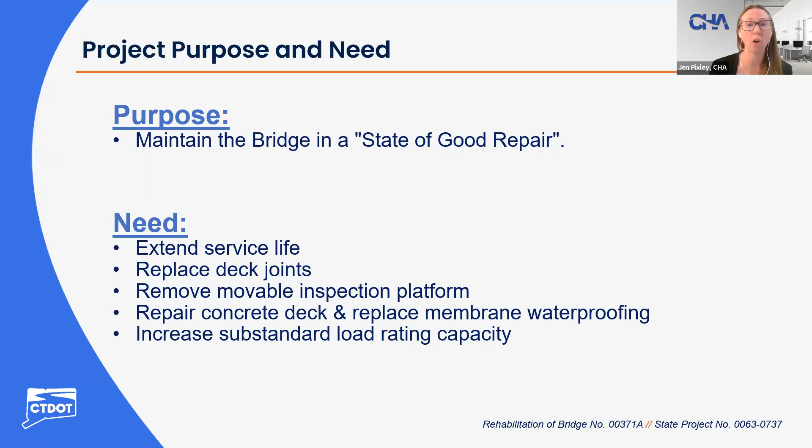So for project location, Founders Bridge carries Route 2 eastbound and westbound over I-91, the Connecticut River, and the Connecticut Southern Railroad in Hartford and East Hartford. The bridge was built in 1958 and had a full superstructure replacement in 1995.

The bridge carries 3 lanes in the eastbound direction and 4 lanes in the westbound direction. Spans 1 through 5 have an out-to-out dimension of approximately 92 feet and widens to approximately 112 feet at spans 6 through 11, as an 18-foot wide sidewalk frames into the main structure on the bridge on the south side at Pier 4.

So here is a colored plan and elevation view of Founders Bridge. This view shows the west side of the bridge on the Hartford side, and the next slide will show the East Hartford side.

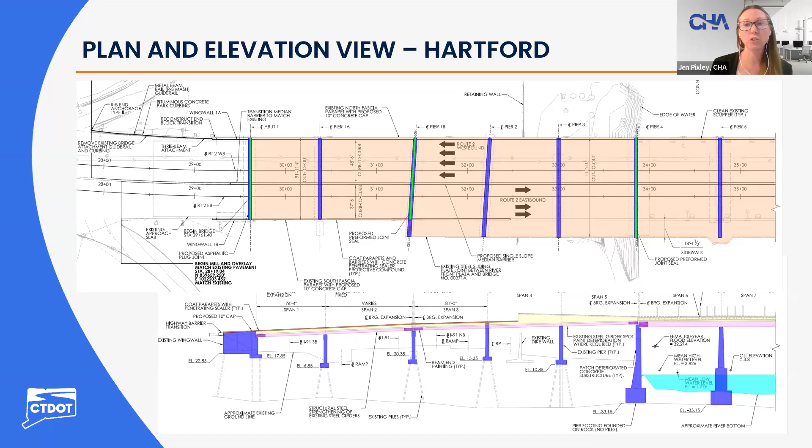So the bridge is an 11-span structure comprised of a concrete deck supported by welded steel plate girders. Spans 1 and 2 are 2-span continuous. Spans 3 through 5 are 3-span continuous, and spans 6 through 11 are 6-span continuous. The superstructure is supported by a concrete abutment and piers.

So Route 2 is a divided highway consisting of 4 11-foot travel lanes on the westbound side and 3 11-foot travel lanes on the eastbound side, with a 3.5-foot right shoulder and 1-foot left shoulders. Concrete parapets exist at both fascias and the medians. The median barrier separates Route 2 eastbound and westbound, and a sidewalk barrier separates the sidewalk and Route 2 eastbound.

Before getting into existing conditions, I thought it'd be useful to note how condition ratings are determined and their purpose. Per the CTDOT Bridge Inspection Manual, a condition rating is a judgment of a bridge component's condition in comparison to its original as-built condition, used to provide an overall characterization of the general condition of the component being rated. Condition ratings are assigned a numerical value, each indicating a different condition: 8 being very good, 7 good, 6 satisfactory, 5 fair, and 4 poor.

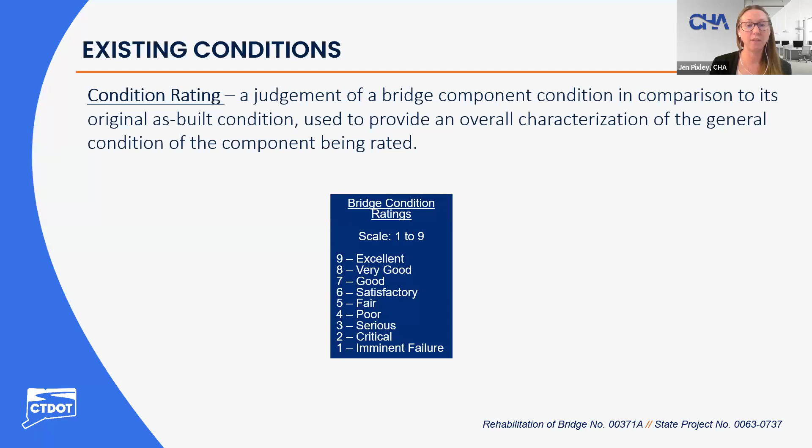So now we'll discuss existing conditions of Founders Bridge. First, for the deck. Overall, the deck is noted to be in satisfactory condition.

The underside of the deck exhibits shallow rebar, map cracking, and hairline cracks with efflorescence and rust staining, some of which have dampness and seepage. There is isolated honeycombing with exposed rebar up to 1/2 inch deep, numerous hollow areas, numerous spalls up to 2.5 inch deep, and isolated spalls up to 4 inch deep. Several of these spalls have exposed rebar.

So the true condition of the deck is unknown due to the bituminous concrete wearing surface on top.

Existing deck joints are in fair condition. There are asphaltic plug joints at abutment 1 and Pier 1B, which were installed in 2012. There are modular deck joints with concrete headers located at Pier 4 and abutment 2, which are original to the deck and were installed in 1995.

The asphaltic plug joints were recently repaired. Modular deck joints exhibit separations up to 15 feet long between glands and steel extrusions, with light visible below, moderate sand impaction in the joint glands, as well as ponding water. Concrete headers exhibit random spalling up to 1 inch deep, as well as other spalls up to 2 inch deep. The pourable seal joint at abutment 2 is missing up to 50% of the joint length.

The sidewalk sliding plate deck joints with concrete headers are located at Pier 4 and abutment 2 and exhibit isolated spalls up to 3/4 inch deep in the concrete header. The concrete parapets are in satisfactory condition and the medians are in good condition.

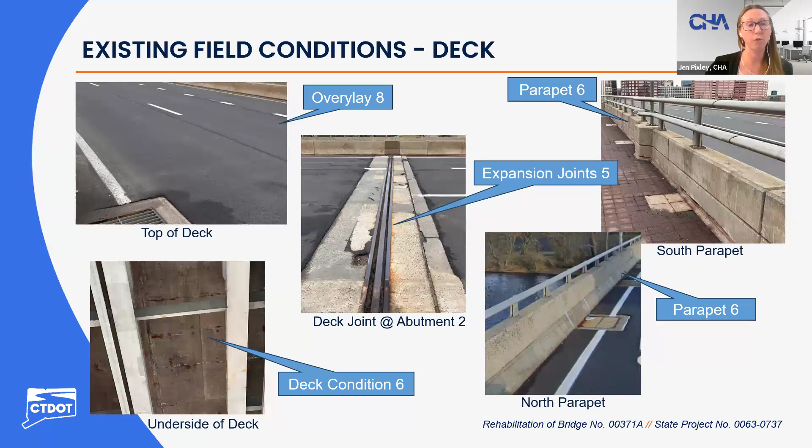So, existing conditions at the approaches. Overall, the approaches are in satisfactory condition. The approach slabs are not visible as the approach pavement is noted to be in very good condition, as they were recently paved. Approach guide rail at the northwest approach is in satisfactory condition and exhibits some collision damage. This guide rail appears to meet RI standards. The guide rail and bridge attachments do not meet current CTDOT standards and are not MASH compliant.

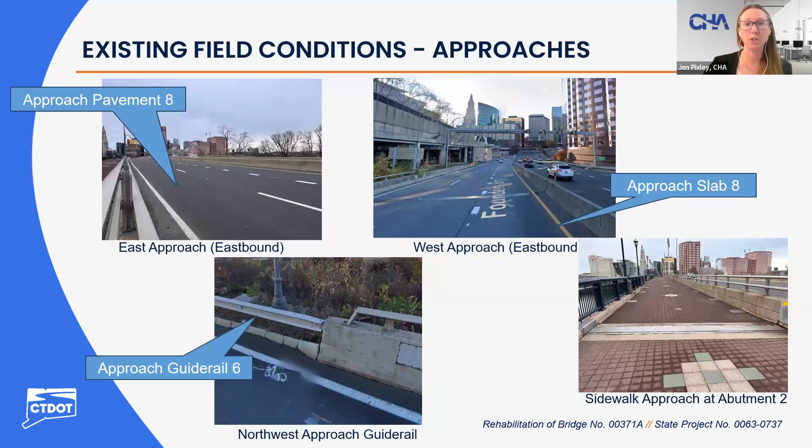Existing conditions for the superstructure. Overall, the superstructure is in satisfactory condition. The bearings are noted to be in fair condition. The bearings consist of elastomeric expansion bearings, steel fixed bearings, and pot bearings.

The elastomeric bearings exhibit isolated minor curling and bulging, random gaps up to 1/4 inch between the pad and pedestal, with up to 27% loss of bearing contact area, and laminated rust at sole plates.

The fixed bearings exhibit random moderate to heavy rust, anchor bolts slightly tipped and nuts loose or backed off, and gaps up to 1/4 inch between masonry plates and pedestals, resulting in up to 71% loss of bearing contact area at one location, and at all other locations up to 20% loss of bearing contact area.

The pot bearings exhibit isolated sole plates in contact with keeper blocks, light to heavy rust, and up to 1/16 inch deep section loss due to leaking joints, isolated PTFE strips sliding out, and isolated Teflon shavings observed.

The girders are noted to be in satisfactory condition. They exhibit random peeling paint and up to heavy rust, isolated laminated rust, and isolated minor losses, which result in less than 5% flange loss and less than 10% bearing and shear loss.

Structural steel paint is noted to be in good condition, with less than 5% of the exposed steel surface area showing evidence of rusting and missing paint coating.

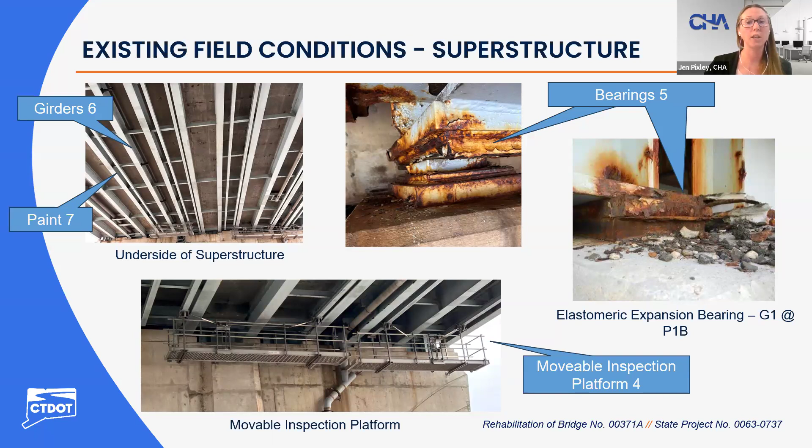The movable inspection platforms are not functioning and are in poor condition. These will be removed as part of this project.

For the substructure, overall, the substructure is in satisfactory condition. The concrete abutments exhibit vertical, horizontal, and map hairline cracks with efflorescence and rust, hollow areas and spalls up to 2-inch deep with and without exposed rebar.

Piers 1A, 1B, and 2 are concrete piers with pier caps and columns, and piers 3 through 9 are solid concrete wall piers with post-tensioning.

The pier caps and columns exhibit linear and map hairline cracks with isolated efflorescence and spalls up to 1/2 inch deep. Wall piers also exhibit linear and map hairline cracks with random rust and efflorescence, as well as isolated hollow areas, isolated spalls with exposed rebar up to 4-inch deep.

Piers 4 through 8 stems extend below the water line and exhibit spalls with exposed rebar and some with section loss, abrasion throughout, hairline cracks, and some cracks open up to 1/8 inch wide.

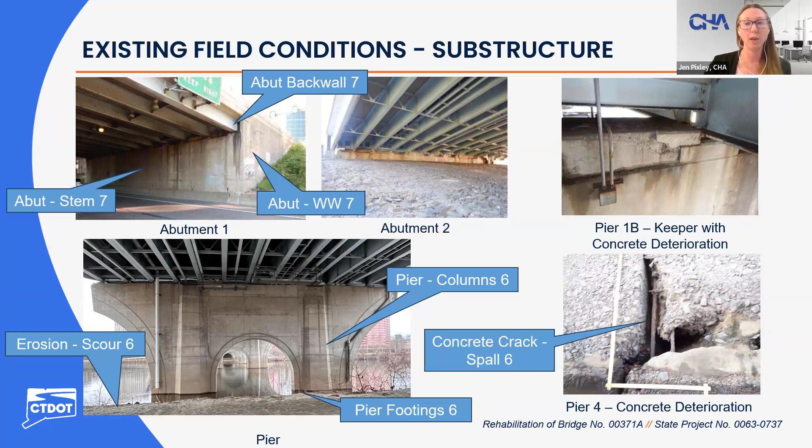For erosion and scour, noted to be in satisfactory condition. There are 2 areas of erosion, one at abutment 2 and one at pier 2, which are both located below scupper pipes.

Existing condition of the channel and protection. Overall channel and channel protection is in satisfactory condition. Channel scour is in satisfactory condition as well.

The channel bottom elevation have areas of aggradation up to 4.7 feet high and areas of degradation up to 7.7 feet deep.

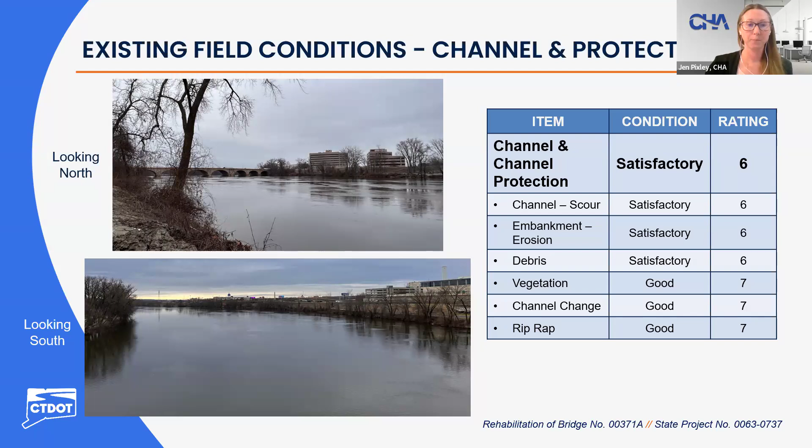Major scope of work items include steel strengthening, painting beam ends, replacing elastomeric and fixed bearings, as well as pot bearings at pier 4 and abutment 2, replace deck joints, replace wearing surface and membrane waterproofing, repair concrete deck, approach slabs and barriers, add a 10-inch concrete cap to the north fascia parapet and portion of the south fascia parapet.

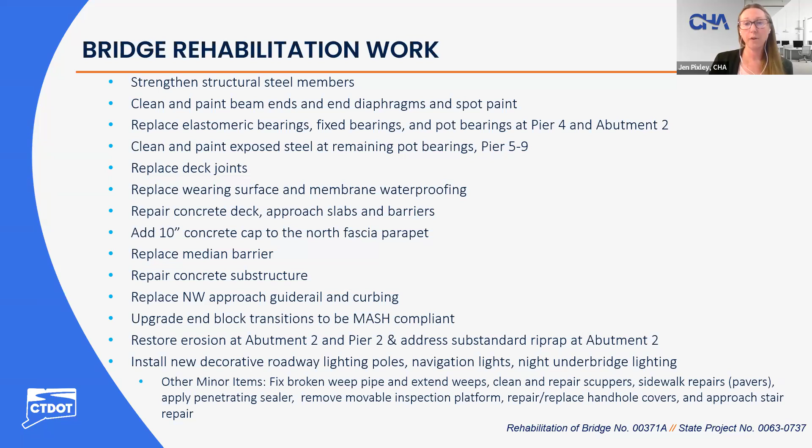Replace median barrier, repair concrete substructure, replace the northwest approach guide rail and curbing, upgrade end block transitions to be MASH compliant, restore erosion at abutment 2 and pier 2, install new roadway lighting poles, navigation light, and night underbridge lighting. Other minor items include repair broken weep pipe, extending weeps, cleaning and repairing scuppers, sidewalk paver repairs, applying penetrating sealer to concrete, removing the movable inspection platform, repairing handhole covers, and repairing approach stairs.

Next, I will discuss some additional information on the existing conditions and proposed repairs on a few scope items.

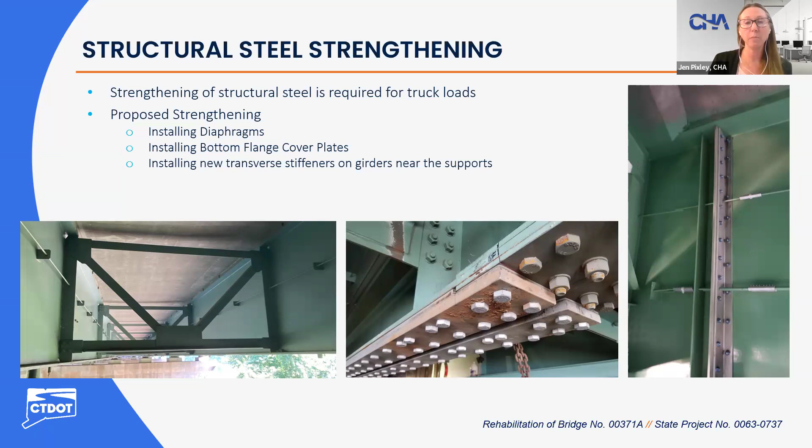Steel strengthening will be performed to bring the structure up to current code standards. Strengthening includes adding diaphragms, installing bottom flange cover plates, and installing transverse stiffeners.

For bridge joints, as noted previously, they are in fair condition. There are asphaltic plug joints at abutment 1 and pier 1B. There are modular deck joints that are original to the deck and were installed in 1995 at pier 4 and abutment 2. All deck joints will be replaced.

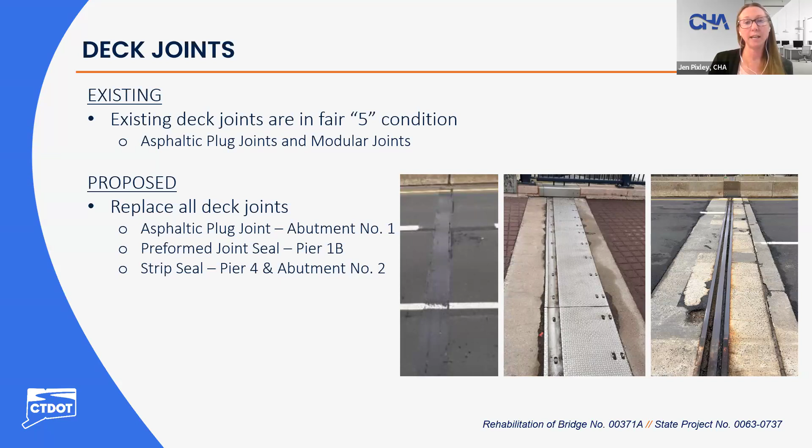Asphaltic plug joints at abutment 1, preformed joint seal at pier 1B, strip seal at pier 4 and abutment 2. It should be noted that preformed joint seal and strip seals require deck end reconstruction to install the new joints.

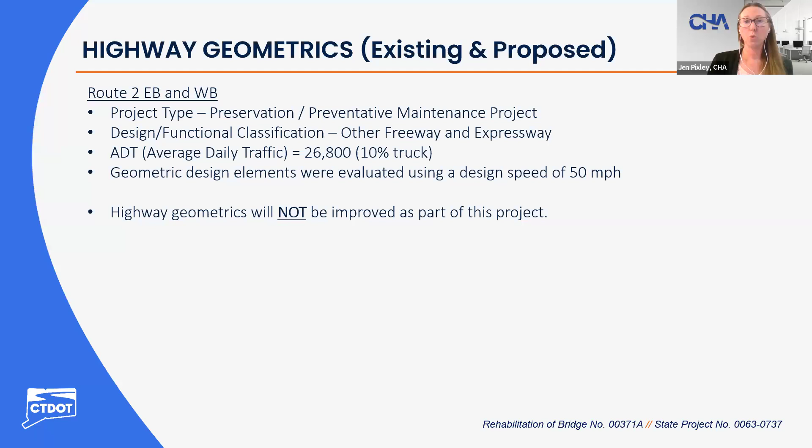Quickly touching upon highway geometrics for this project, the bridge has an ADT of approximately 27,000, and the bridge will not improve any highway geometrics.

Environmental resources and anticipated permits are listed on this slide. Temporary and permanent wetland impacts are not anticipated. Barges may be required to complete the construction work. Coordination with U.S. Coast Guard and DEEP Boating will occur to minimize navigation impacts.

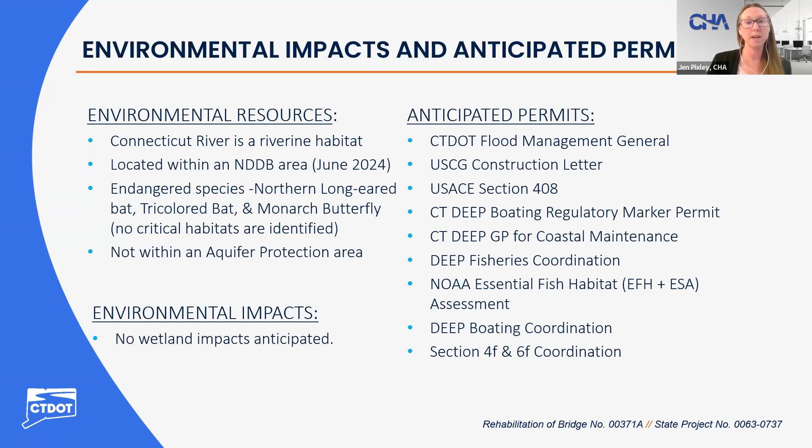For anticipated project impacts, maintenance and protection of traffic on the bridge will utilize staged construction for repairing the concrete deck, installing the waterproofing membrane and pavement, replacing deck joints, replacing the median, and capping concrete parapets. This work will be accomplished using temporary lane closures and lane shifts. It is anticipated a portion of the deck repairs and deck joint reconstruction may be accomplished using temporary off-peak lane and shoulder closures.

For sidewalk repairs, the work area and pedestrian path will be separated by water-filled barrier, and the contractor will be required to maintain a minimum 5-foot pedestrian path throughout the entire construction duration.

Stage construction will be utilized. Stage 1 will close the left lane of Route 2 eastbound and westbound, while Stage 2 will close the right lanes of Route 2 eastbound and westbound.

There are no anticipated impacts to the utilities. Anticipated impacts to the rights of way include temporary easements for addressing erosion at Pier 2 and Abutment 2, as well as access for various rehabilitation items.

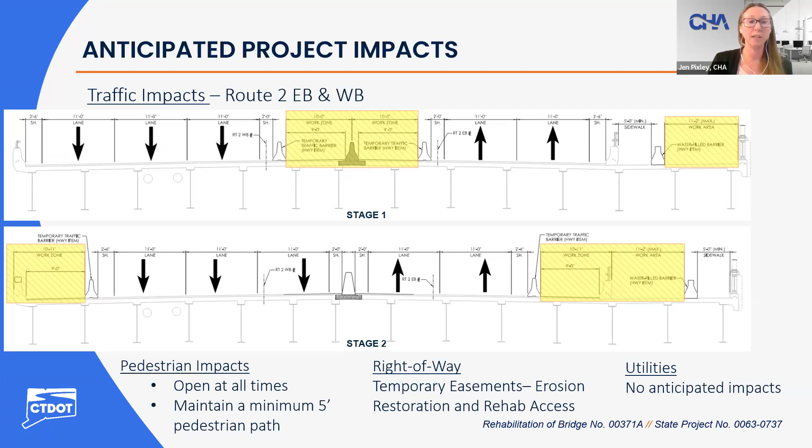Additional anticipated project impacts. For Founders Bridge, our bridge spans over roadways, railroad, and walkways. In span 1, we have I-91 southbound, where beam end painting and bearing replacement may require temporary lane shifts or closures.

In span 2, at Grove Street to I-84 westbound on-ramp, steel strengthening and bearing replacement may require a ramp closure, with a detour utilizing Sheldon Street on-ramp. We also have I-91 northbound to I-84 westbound on-ramp, where beam end painting, bearing replacement, and steel strengthening may require temporary lane shifts or closures.

For span 3, over I-91 northbound, beam end painting and bearing replacement may require temporary lane shifts or closures. And Grove Street to I-91 northbound on-ramp, bearing replacement may require ramp closure with a detour utilizing Sheldon Street on-ramp.

In span 4, the Connecticut Southern Railroad is located adjacent to Pier 2, where bearings are to be replaced. It is anticipated that these bearings will be replaced from the span 3 side of Pier 2.

Below span 5, we have the Hartford River Walk, which extends below spans 4 and 5. There will be substructure repairs at Pier 4 and bearing replacements at Piers 3 and 4.

And lastly, in span 10, the Great River Park Trail extends below span 10. There will be substructure repairs and bearing painting at Pier 8.

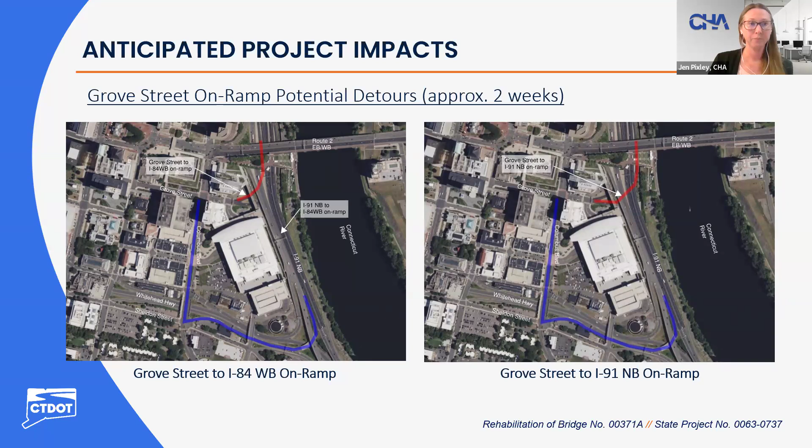In addition to the previous detours, the following detour is for traffic entering Grove Street from the Science Center or the Convention Center. Traffic here cannot turn left onto Columbus Boulevard, so this detour will direct traffic north on Columbus Boulevard to State Street, up Market Street to Kinsley Street, and back down Columbus Boulevard, utilizing the Sheldon Street on-ramp.

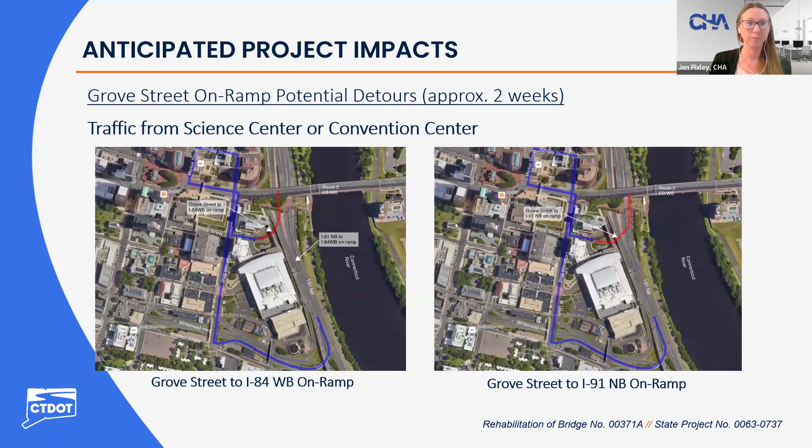The contractor may temporarily require access through these trails to reach the underside of the bridge. There will be no impacts to the dike wall in Hartford, and the levee in East Hartford requires temporary access to reach Abutment 2.

Also, repair of riprap at this location may be included in this project. Coordination on this is still ongoing.

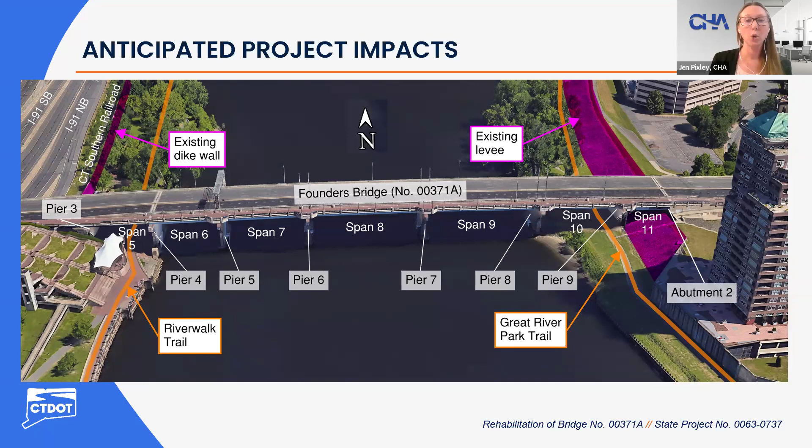Potential laydown locations. We are evaluating two potential locations, both at the east approach. The first is located just adjacent to the existing ramp to Pitkin Street, and the second is located adjacent to the on and off ramp at Darlin Street.

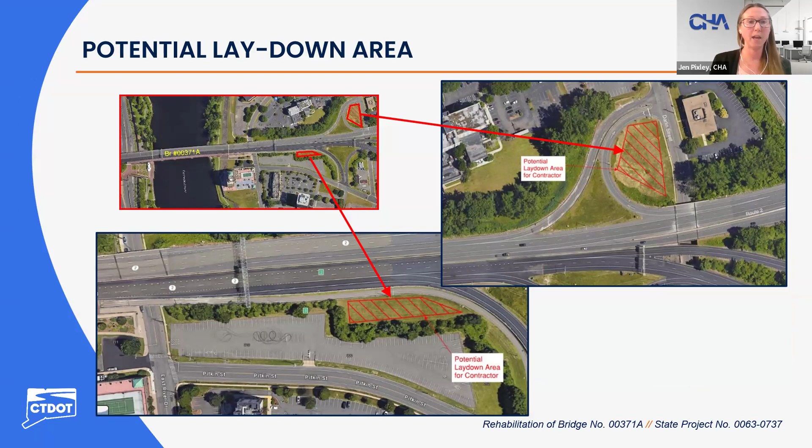This concludes the technical presentation. Luke will now discuss schedule and cost.

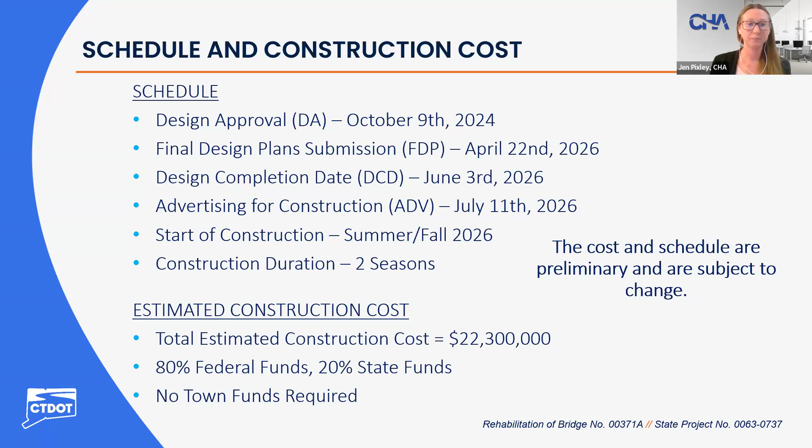Thank you, Jen. For the schedule, we have design approval coming up on October 9th of this year, 2024. Our final design plan submission is due April 22nd of 2026. Design completion date is June 3rd, 2026.

We will advertise this project for construction July 11th, 2026. We anticipate construction to begin in the late summer, early fall of 2026. We expect construction to take two seasons.

Right now, the total estimated construction cost is $22.3 million, funded 80% by federal funds, 20% by state funds, and no town funds required. I'd like to point out that the cost and schedule are preliminary and subject to change.

To summarize tonight's meeting, I'd like to restate some important information. This is a bridge rehabilitation project, which will extend the useful life of the structure as well as increase the structural capacity. Route 2 eastbound and westbound traffic will be impacted with staged construction.

Stage 1 is mainly for the median replacement as well as deck repairs and joint replacement. Stage 2 is for the outside barrier work along with deck and joint work.

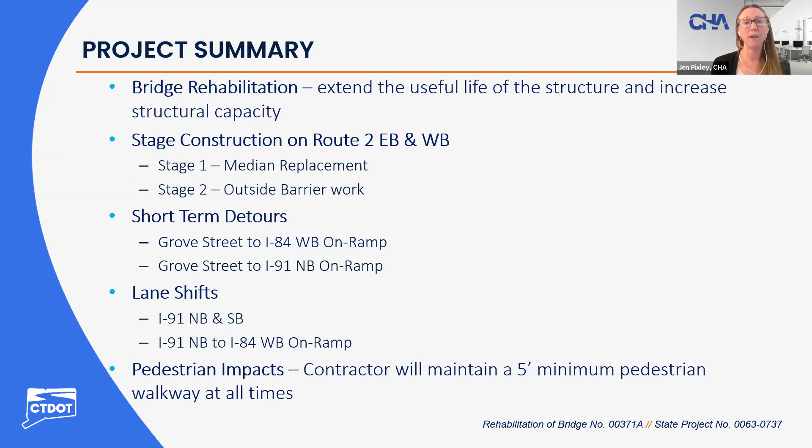Short-term detours will be required for the Grove Street on-ramps to I-84 westbound and I-91 northbound. Lane shifts on roadways below the bridge will be required for I-91 northbound and southbound. Lastly, pedestrian impacts will include reduced walkway widths, but a minimum width of 5 feet will be maintained. This concludes our presentation.

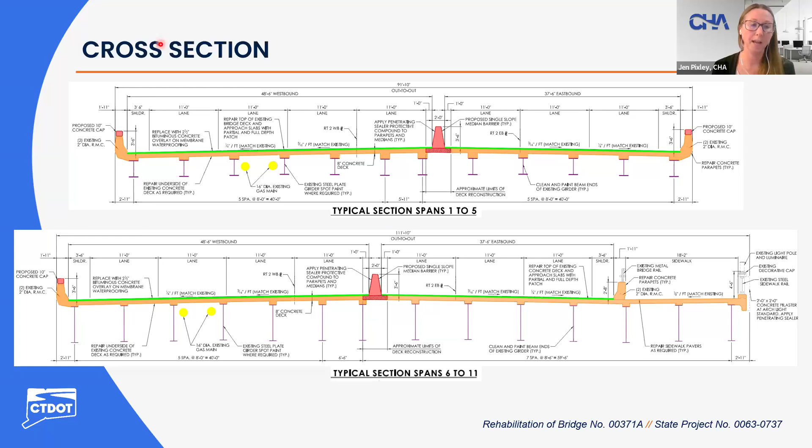If there are going to be barges and they need some kind of facility to get access on and off, it would be great to do it from Charter Oak Landing, which is at the bridge to the south of the Founders.

Typically we'll do it from an established boat launch. We won't be cutting in, especially with the levee system over in that area. The Charter Oak landing is better suited for that than any of the other boat launches on the river in East Hartford. That's excellent info, because as we start permitting, they will definitely ask us which one.

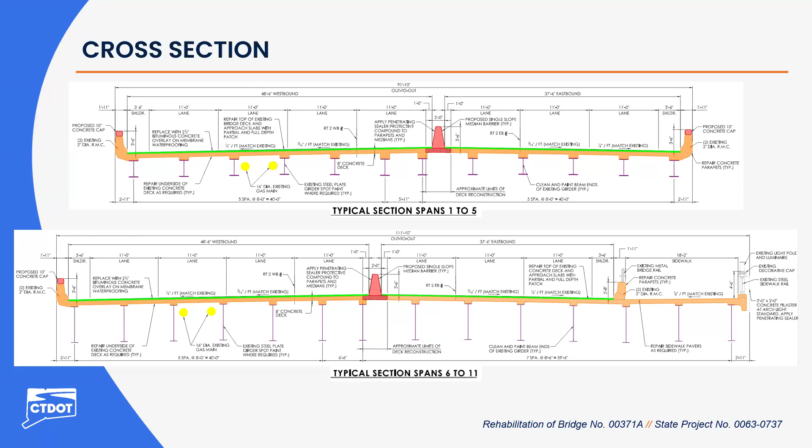Also know that you cannot take a tractor trailer in from the Hartford side to the bridge. It all has to be with a straight truck. You can't physically turn a tractor trailer underneath the I-91 southbound viaduct.

For the detour, you mean? No, for construction access. Can you restate that? Where is it not available? So there's an existing paved access road that comes in from Van Dyke Ave by the Colt building.

It's something Riverfront Recapture maintains. It's on a combination of state, private property, and City of Hartford property. It has a 90-degree turn in it that you can't drive a regular tractor trailer through. It can't make the turn.

If you're bringing in a crane, it has to be either a small crane or a crane with all-wheel steer. You can bring a straight bed truck in, but you cannot take a tractor trailer in there. Great, that's great, thank you.

The inspection platforms, having installed them many years ago, are actually still operable. You just have to adjust the tension on the wheels to get them to move, and you need like a superhuman person in there to turn the handle to get them moving. I don't know if you guys are aware of that or not.

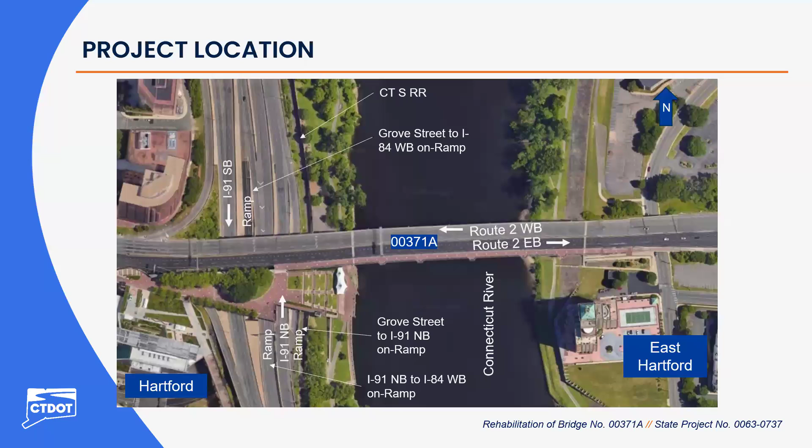We're wrapping up preliminary design. After that is design approval. Then we'll move into final design, try to lock in the design and further vet some of this coordination and other activities. And I'd say that's mostly it before we submit the plans and move to construction.

It'd be great to keep Riverfront Recapture in the loop on what's going on. More than happy to share knowledge that we have, real-time knowledge of what's going on the bridge. I think we could be beneficial to the project process, and the more we communicate, the better end product we'll have for everybody as far as coordination, speed of construction, and least amount of conflicts possible.

I totally agree. Mark, you've been a wealth of knowledge tonight - it's almost like you're part of the team already. So I think we'll definitely keep you in the loop going forward. Okay, great. Yeah, thanks Mark, for all the info. We definitely keep you in the loop.

And since you're here, are there any good activities going on the next few weekends? We were supposed to have a Jimmy Buffett tribute concert tomorrow night at the Plaza, but that's been canceled thanks to Tropical Storm Debby. But next Saturday is our Dragon Boat and Asian Festival, that'll bring 15,000 people down to the downtown area for Dragon Boat racing on the river. We've got another concert on the 23rd, an Eagles tribute band, and then we have a regatta in October. The Hartford Marathon comes through in October too. There's something else in September I can't remember, but there's always stuff going on.